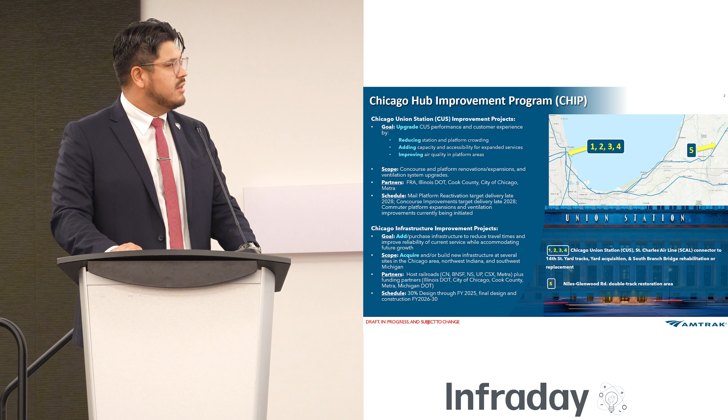Our goal for the Chicago Union Station improvement projects is to upgrade the performance and customer experience of the station, reduce station and platform crowding. Some of y'all have been there, and you know Amtrak is the owner of the station, but Metra is also a tenant, so during rush hour the station can get very packed. We're also adding capacity and accessibility for expanded services, and improving air quality at the platform level.

The scope of work includes concourse and platform renovations and expansions, and ventilation system upgrades. Our partners are the Federal Railroad Administration, Illinois DOT, Cook County, City of Chicago, and Metra.

Our schedule for this varies, as different projects have different schedules. Just a brief overview: the mail platform reactivation target delivery date is 2028, same for the concourse improvement project, late 2028. The commuter platform expansions and ventilation improvements are currently being initiated.

Now, on the infrastructure improvement projects, that's a different component of CHIP. Our goal here is to improve the infrastructure to reduce travel times and improve reliability of current service.

Scope: this means we acquire or build new infrastructure at several sites in the Chicago area, Northwest Indiana, and Southwest Michigan, which is at number 5 on the screen. Our partners include the host railroads—CN, BNSF, Norfolk Southern, UP, CSX—and our funding partners: Illinois DOT, City of Chicago, Cook County, Metra, and Michigan DOT. Our schedule is 30% design through fiscal year 2025, with construction sometime between fiscal year 2026 and 2030.

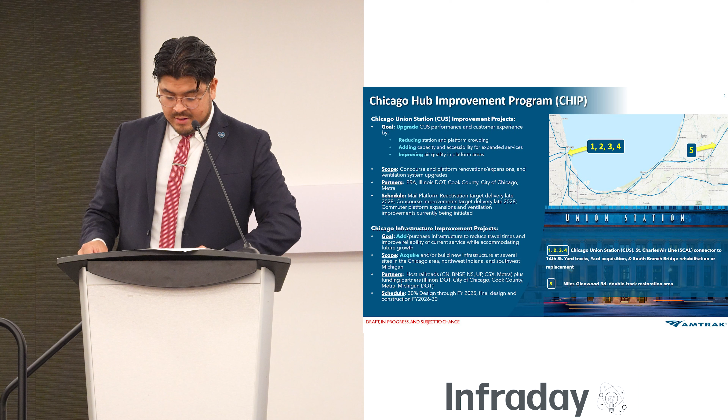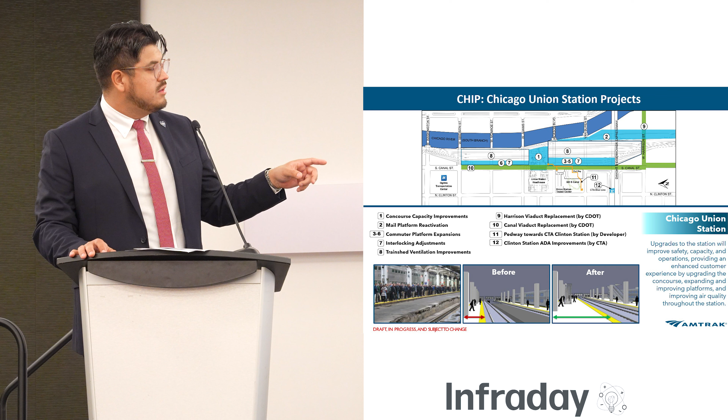Let's dig into our station components. I'm not going to go through all 12 projects, but we'll focus on the concourse capacity improvements, the mail platform reactivation, commuter platform expansions, and the ventilation improvements.

This map gives you an aerial view of Chicago Union Station. You can see in blue the river, and in green the Canal Street, which is currently being worked on by the Chicago DOT. That's why you see a big canopy blocking the street, which is also adding to traffic congestion in that area.

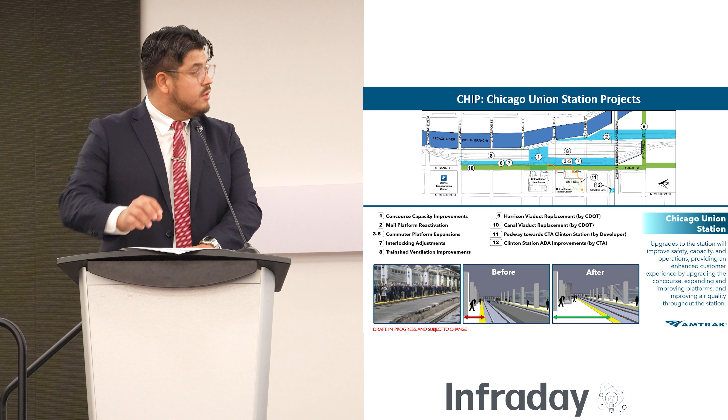We want to activate the mail platform so it can be used by our passenger trains. Let me show you—this will, in addition to activating the platform, also create additional rail capacity and operation flexibility at the station. Since those platforms are currently unused, we want to be able to bring trains in on that, adding capacity into the station, and it'll provide the first level boarding platform for Chicago Union Station, making it easier to access for our passengers.

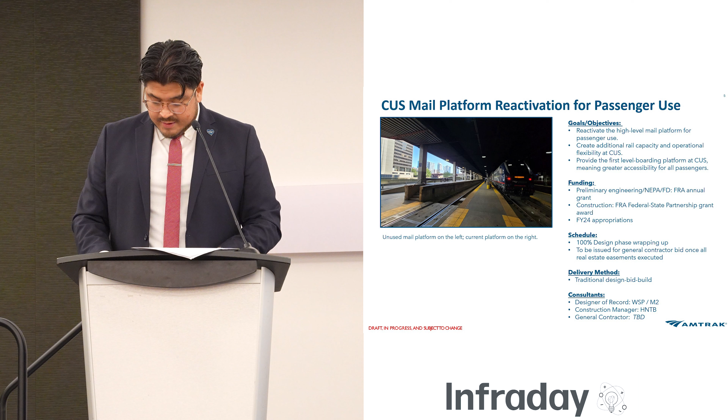For preliminary engineering funding, we're currently using an FRA annual grant. For construction, we have an FRA Fed State Partnership grant. We're also using Amtrak FY24 annual appropriations for this reactivation. On schedule, the 100% design phase is wrapping up, and it'll be issued for general contractor bid once all real estate easements are executed. You can see our consultants at the bottom.

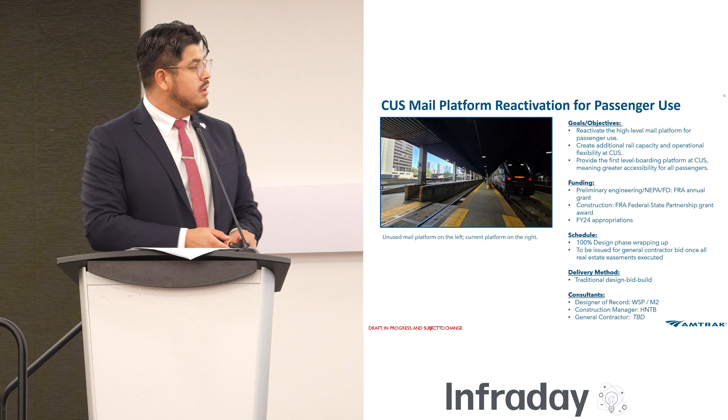Let's go to the next one. Here's an aerial perspective of the mail platform. In blue is where the trains are pulling up into the station—you see the concourse. In red is where the passengers would walk into the mail platforms.

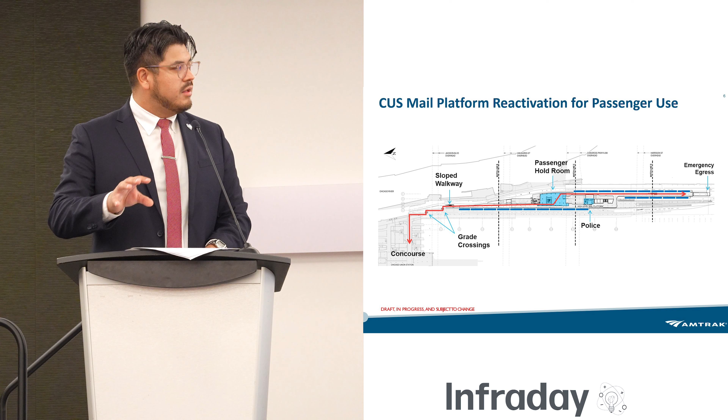That means we're also going to have to build additional holding room for passengers, and we'll have an office for police as well, since it's a bit further of a walk from the concourse itself. We have to ensure we're looking out for the safety of our passengers and our equipment, and there's an emergency egress stairwell to take into account. I wanted to briefly show you another aerial 3D perspective of where we are building those emergency egress stairwells.

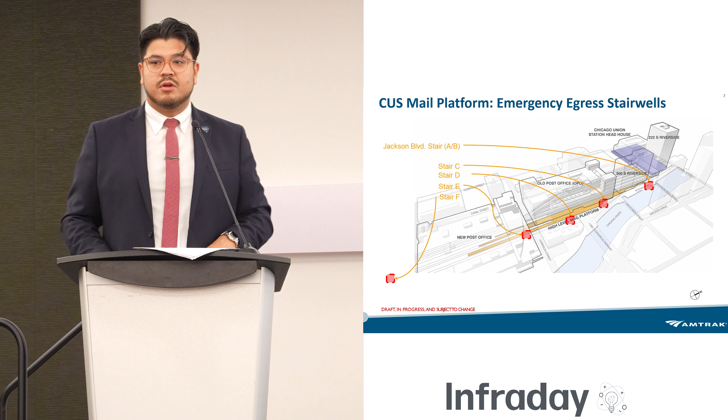The concourse improvement projects. There's a lot of congestion there currently. The last time the station was renovated was in the early 90s, so we've pretty much reached the capacity of the station. If we're at capacity now in 2024, and looking to double our ridership by 2040, you can only imagine what it's going to look like. So we really want to ensure we're opening up the spaces and making it much more friendly to the customer, to the passenger.

Getting on their Amtrak train or their Metra train. For funding, we have preliminary engineering, PE, and NEPA through the FRA annual grant. The final design is a combination of annual and discretionary grants, and construction for this is TBD. We're currently seeking discretionary funding for that.

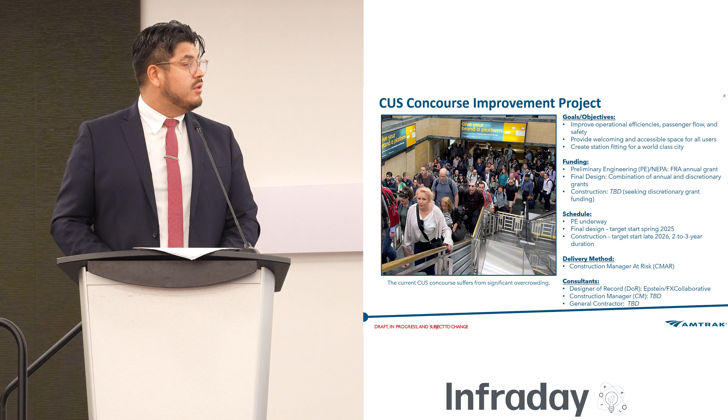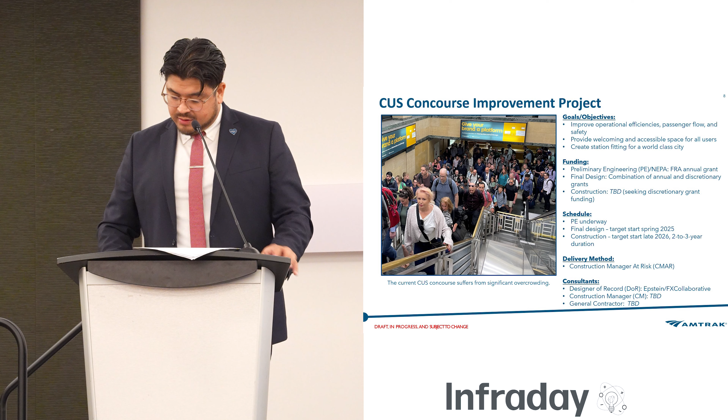The schedule: PE is underway. Final design, we're targeting spring of next year, 2025, with a construction target of 2026, and it'll be about a 2 to 3 year construction project. The designer of record is Epstein FXCollaborative, and our construction manager and general contractor is TBD.

Let me show you some visuals so you can see what's happening at the station and what the improvement is. As you can see, they're lined up: the concourse, the mezzanine level, and the street and plaza. On the concourse level, the white area is the passenger common area. If you're going north and south on the concourse level, it's a very thin white line dividing the station. We want to open up those spaces for better passenger flow, and also for security purposes, to have a better line of vision between the north and south platforms.

The mezzanine level, where the food court is - sometimes it's pretty dark there, and the lines of sight aren't that good either. So we want a more inviting atmosphere. In the street plaza, where the old concourse building used to be, we now have these 3 entrances, and we want to improve the entrances leading into the station. That's all part of the scope.

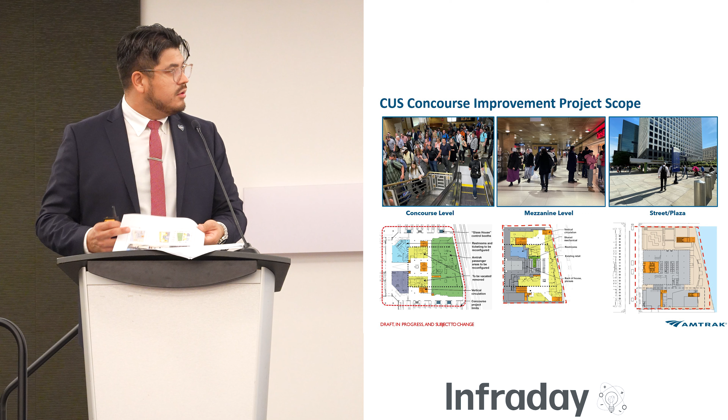Part of this is also looking at the design character. On the left is a conceptual drawing of the CUS, Chicago Union Station, concourse, contrasted with the bottom, which is the old concourse of Chicago Union Station. That building was demolished in 1969. When looking at these concepts, we're really trying to pay homage to, and be inspired by, the amount of lighting that was coming into the station.

So we want to renovate and enable passengers to be much more efficient in the way they move around, and just have a better time at the station. We want to create a more vibrant transportation center. As the hub, we want to make sure that when we welcome visitors to Chicago, they get off the trains and are greeted by a beautiful modern station, and we provide a superior customer experience to our passengers.

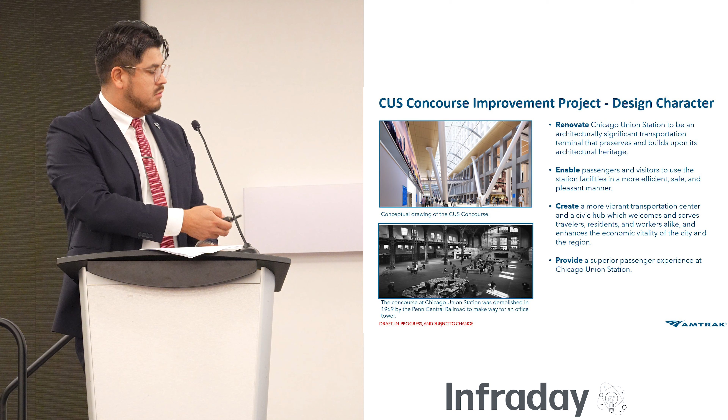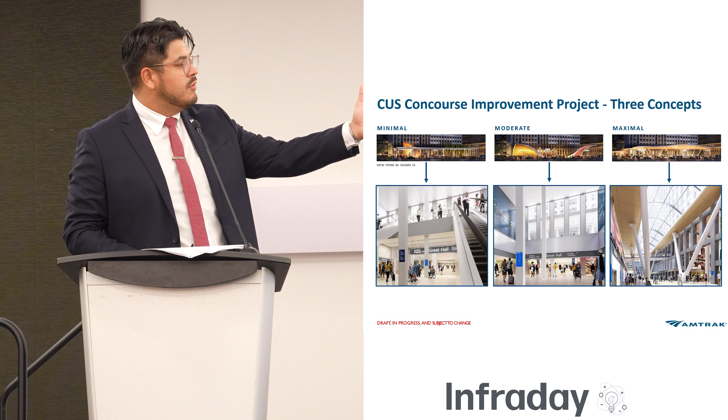Again, these are conceptual drawings. These at the bottom are also conceptual drawings. We're looking at 3 concepts: minimal, moderate, and maximal. This is going to all depend on the type of funding we receive. Obviously we're striving for the maximal concept, but it all depends on the funding.

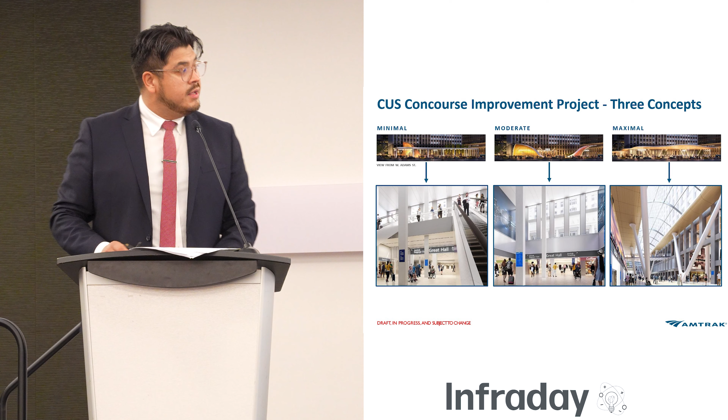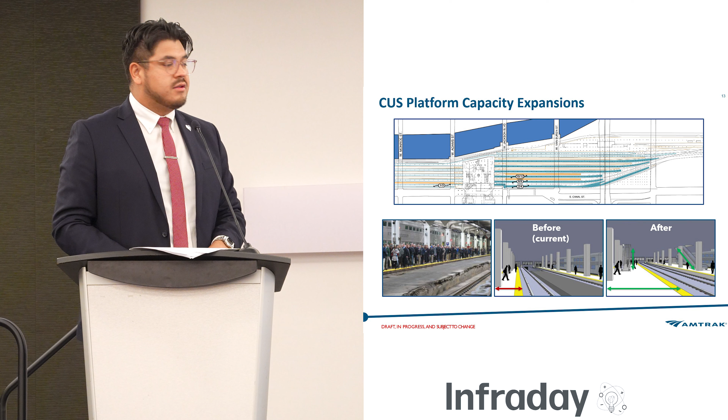Platform capacity and ventilation improvements. Currently, as you see on the left, when people are getting off Metra trains, the platforms are very narrow. I gave you an illustration of what we mean by widening the platforms. We want to make sure there's better passenger flow, ADA accessibility, and faster boarding times for folks on the trains.

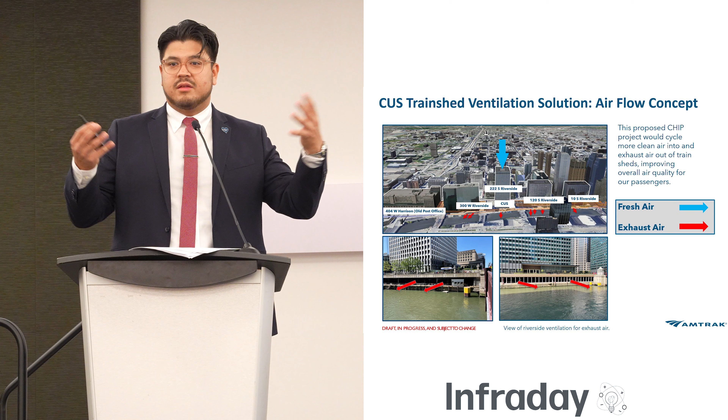And then the train shed ventilation solutions. We want to ensure that air is flowing from the platforms. As you've all been on the train, sometimes it smells like exhaust down there. So we want to be able to ventilate that air from the outside and then towards the river.

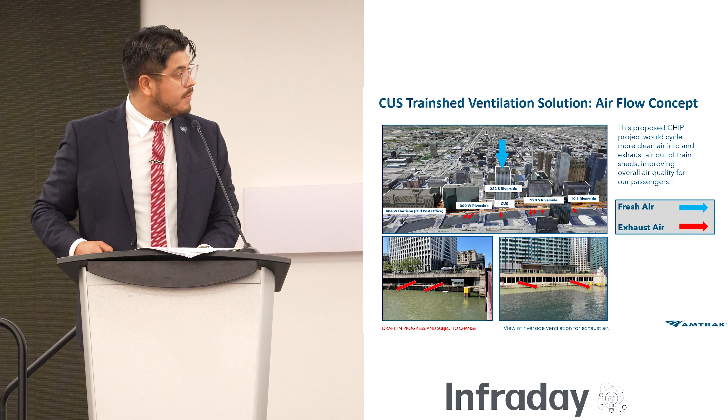I'm going to quickly go through the infrastructure projects. These are really important to increasing capacity of our trains and improving reliability and speed. Currently, on our trains coming in from Champaign, Carbondale, or City of New Orleans, they have to do this backup maneuver into the station.

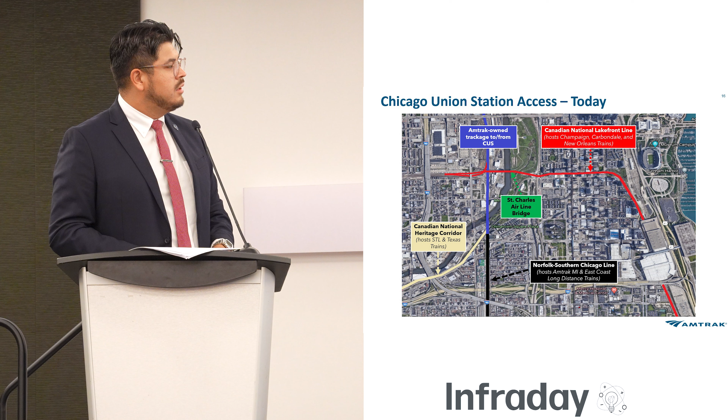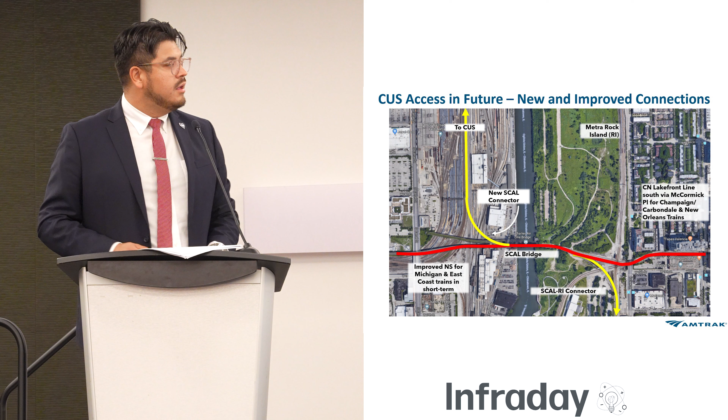Here's an aerial view of Chicago showing the St. Charles Airline Bridge. If you're on 18th Street crossing the bridge and look north, that bridge is kind of in the up position. We want to rehabilitate that bridge. Currently, shown in red, our trains come in from the east and have to go west on the red line, then do this backup maneuver to go north back into the station. That adds at least 10 to 15 minutes to the travel time. So really connecting the SCAL to the network would help speed up our passenger time.

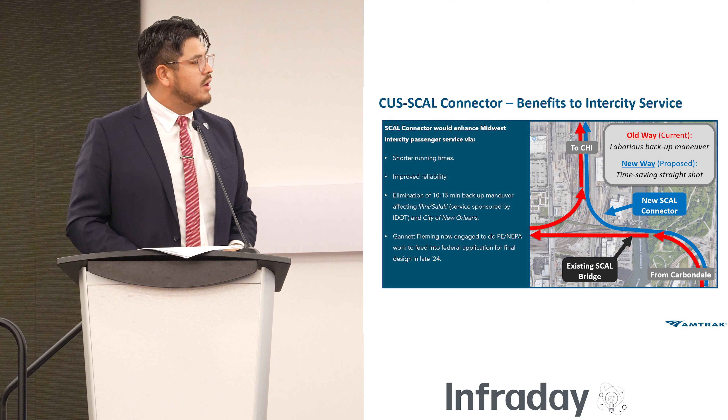You can see here a better illustration. This is the old way, shown in red, and the new way using the SCAL connector going into or out of the station.

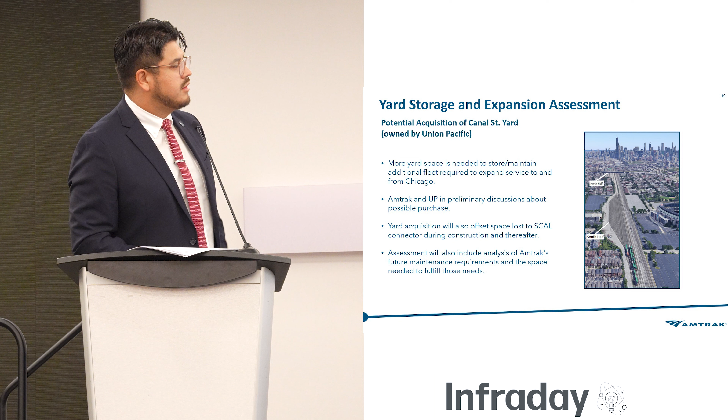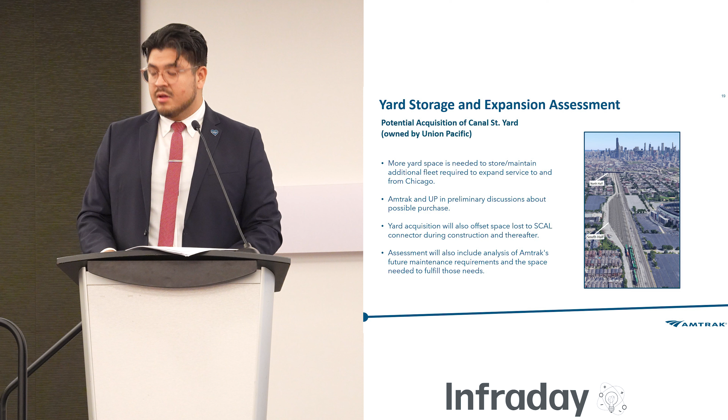I've got 2 minutes left, so I have to speed this up. Yard storage and expansion assessment: the potential acquisition of the Canal Street Yard. Here you see the yard on the left, and on the right the White Sox stadium. We need more yard space to maintain the additional fleet required to expand services to and from Chicago, so we're in preliminary discussions with Union Pacific about the possible purchase of a yard. This will also offset space lost due to the SCAL connector during construction and afterwards.

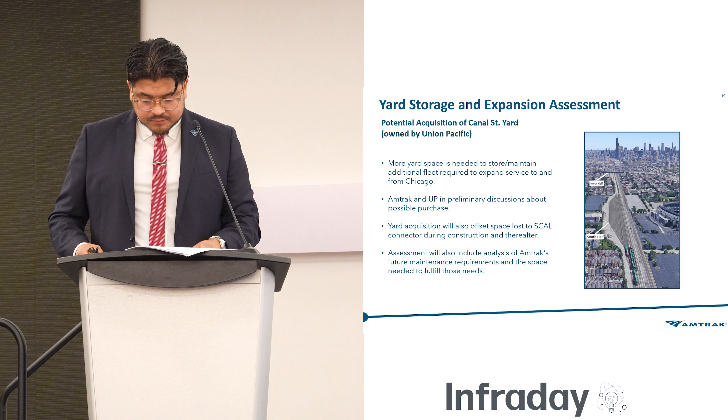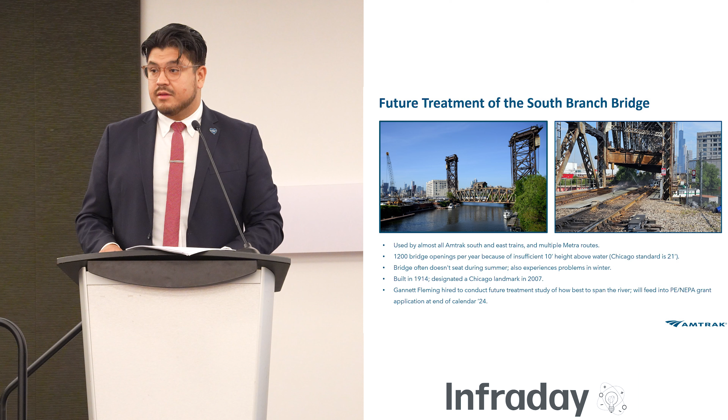We were talking about climate change and things like that. On the right-hand picture, you can see we have to install a sprinkler system to cool the tracks and the mechanisms that lift the bridge during the summer, because of the expansion and contraction of the steel—you can see a boat passing by as the bridge is lifted. This bridge was built in 1914, over 100 years ago. Gannett Fleming was hired to conduct a future treatment study on how best to figure out what we're going to do with this bridge. This will eventually feed into the PE NEPA process at the end of this year.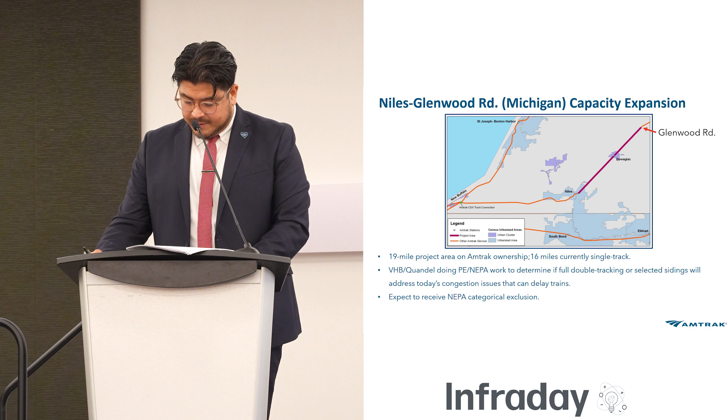The last thing—I don't want to leave our neighbors in Michigan out—we're also looking at capacity expansion between Niles and Glenwood, the route that takes you from Chicago to Detroit. It's a 19-mile project area with Amtrak ownership. VHB and Quandel are doing PE NEPA work to determine if it needs double tracking or selected sidings to address congestion going in and out, again increasing capacity.

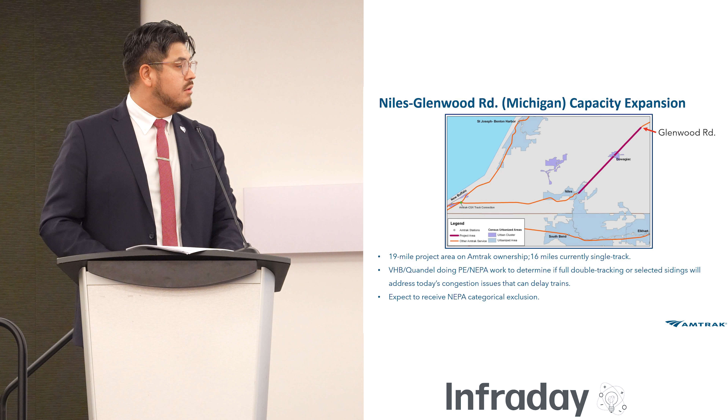So that's what we have coming up, really exciting work happening in the next couple of years, and I hope to see you all at Union Station taking a train sometime soon. Thank you so much.